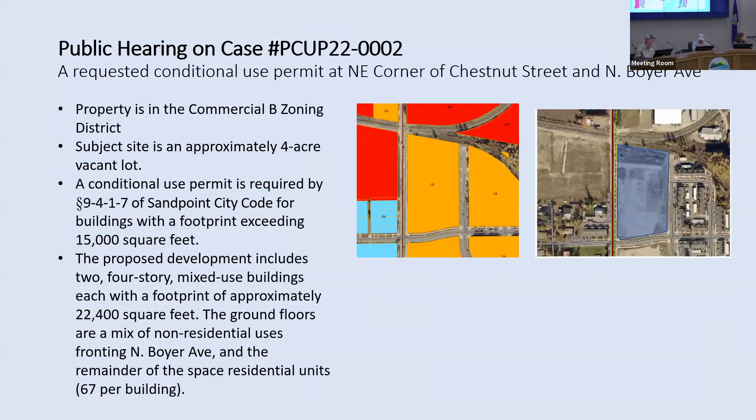I have a question related to the traffic study. So why are we against having them go onto Boyer? It looks like their parking lot at the north there goes onto Boyer. Again, because it's a principal arterial road, we try to limit access points onto arterial roads.

So if you don't allow them to access there, isn't that creating a dead end at that parking point? And for a fire truck, say there was a fire in that corner and the fire truck needed to get down there and there's parking, isn't that going to create an issue? Not specific to this site, because the building is fronting Boyer. The fire access could access the building from Boyer itself.

Quick question. The 4 stories, what other 4-story structures do we have? Is that an issue at all for public safety or not? It is not an issue. That's not an issue that's come up at all. Gotcha. I believe the apartments behind us are those 4-story? Okay, at least some of them are 4-story. Yes.

And then Amy, I have a question on the geotech. It talked about there's a specific type of foundation required based off of the soil conditions in that area. Do we know if their plans have addressed that? The applicant would probably have to answer that question. Okay.

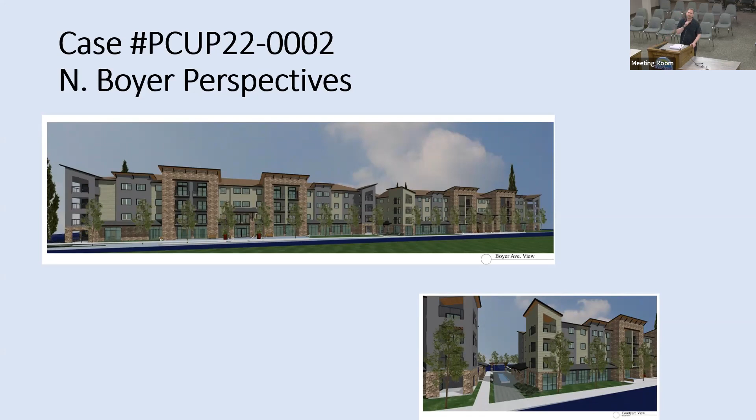But if we could go back to the floor plans, Amy, I think just back a page or two. Sorry. That's okay. Yeah, we're done. All right, floor plans. Here we go.

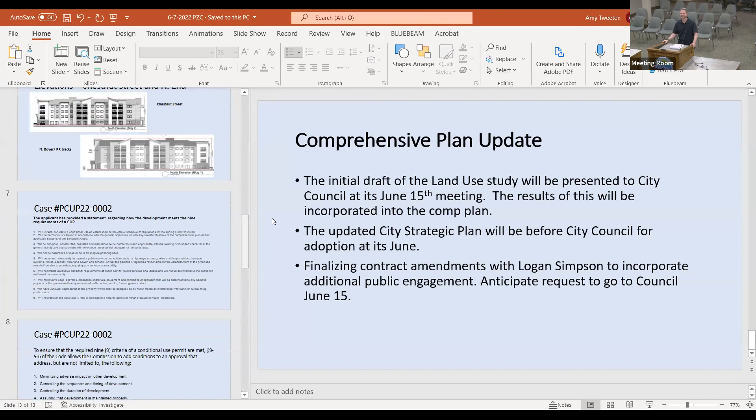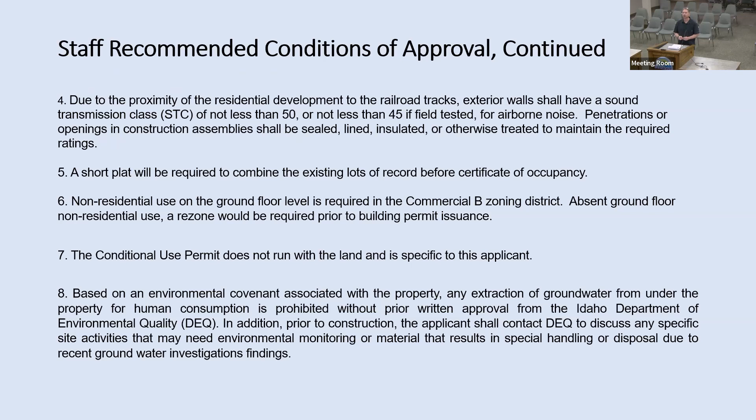So, work shall commence within 1 year—what does that mean? Does showing progress or submitting things count as work towards the project? For permits, I pulled out my narrative here and submitted this 3 months ago—it took 3 months to get here. I don't know how long permitting will take, and I know it's a busy time everywhere, so I'm kind of concerned with the time limits.

The other one was that the duration of the development shall be completed within 3 years. This is one of the things the owners are looking at right now—they're trying to decide: should we build one and see how the market treats it, or should we build both at the same time? These are not going to be cheap buildings. So that's one of my concerns—once construction starts, not knowing even how long it's going to take to get through the drawings and permitting.

But I'm sure this is going to be a year or more in the build of it, so I'm concerned about the 3-year limitation also. So both of those limitations, I don't know if there's a way to put wording in there that allows some flexibility, or if that can come back to the planning, if those have to be a part of the conditions.

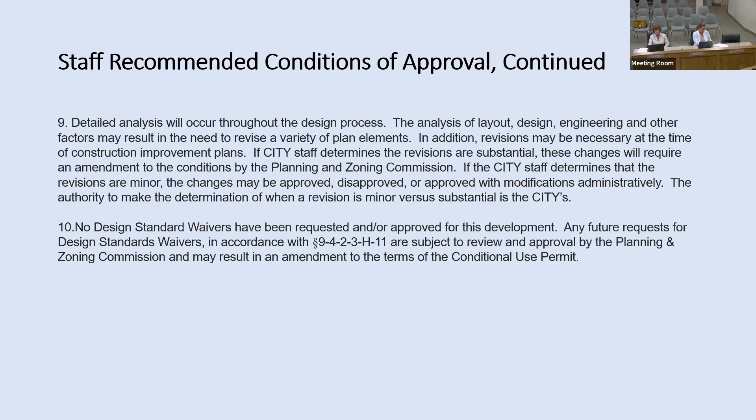9 is just saying we understand minor changes might occur, but anything major would have to come back to the commission. Yeah, and it's our understanding that no design waivers are being requested. Correct, yeah. I have a question about number 6, actually, and then if you can put up the plans of the 2 buildings for me, Amy.

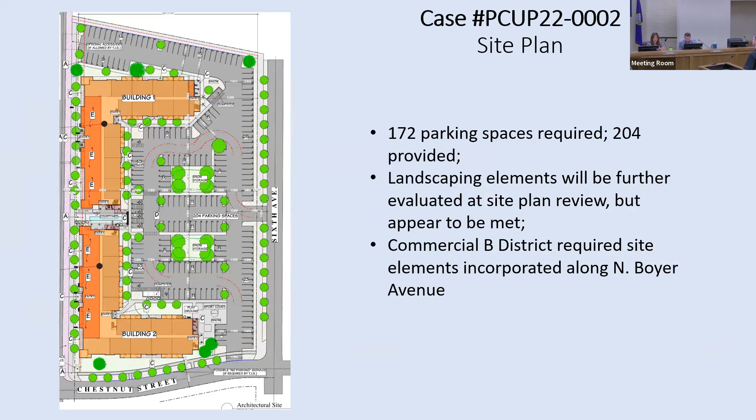That one, yes. Oh, the other one. Oh, floor plan, please. Floor plans? So, yes, thank you. So I'm looking at the commercial spaces.

Is that just - because I noticed that storage in that top one, correct? And from what number 6 says, non-residential use on the ground floor is required, so I imagine that will change. So again, we were at this level of design, we were looking at presenting something that we felt would meet the code and try to get past a litmus test without fully knowing what that space was going to be used for. So what I presented there, for the 2 buildings, are a little bit different, but similar.

What we're showing there would be like storage units that could be leased by tenants. The larger square in the middle was set aside for mechanical space for the whole facility. The next space down was a common entry into the building that could come into the gym space south of that.

Most of that space through the southern end was all dedicated towards workout areas and gym space, with an eye towards this would be great for the tenants, but it might be good to open it up for the neighborhood too. You don't know until you get into it.

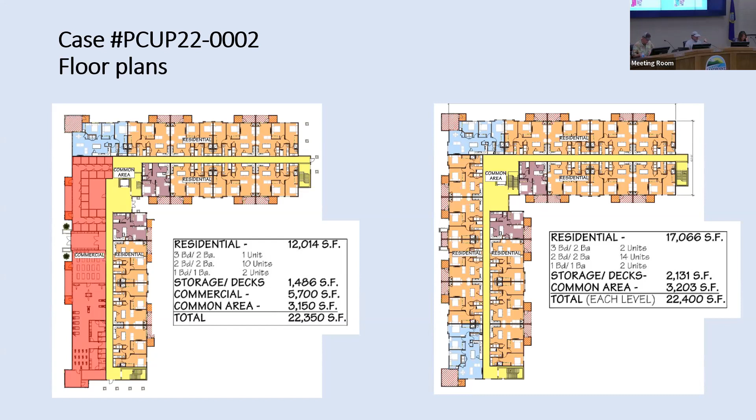Do commissioners have any other questions for the applicant at this time? I do not. No. Okay. Thank you. Thank you. Thank you.

We will now prepare to proceed to the public hearing. For those participating on Zoom, there are none, Mr. Chair. Thank you. We shall proceed.

The public hearing is now open. We will begin with those participating remotely, but we have no one on Zoom. We'll now recognize those in the room who wish to testify in favor, and I see nobody attending. Is there anyone else on Zoom or in the room who wishes to speak in favor? Okay, we'll move on to those who are neutral. Anybody on Zoom or in the room who wishes to speak neutral? And finally, is there anybody in the room or on Zoom who wishes to speak in opposition to this request?

Is there anyone who would like to speak on this matter and has not had an opportunity to do so? Just following the rules. Do commissioners have any final questions at this time? Will you address staff? Soon, yes, soon. And seeing no additional testimony, I'm going to assume that the applicant has no rebuttal at this time.

So if there are no further questions, I will close the public hearing, and at this time we will deliberate. And now is the time where we can ask questions to city staff.

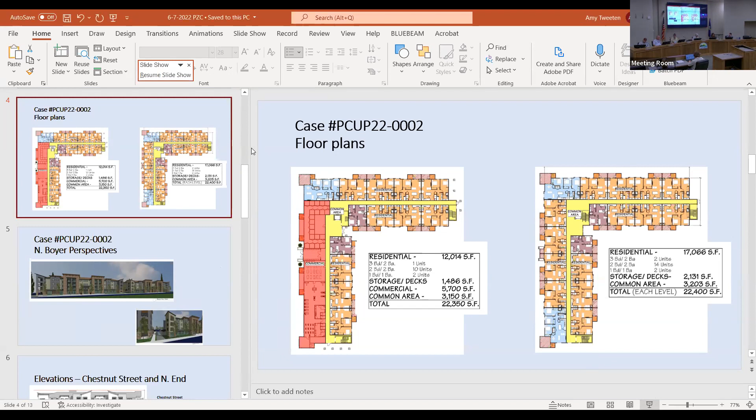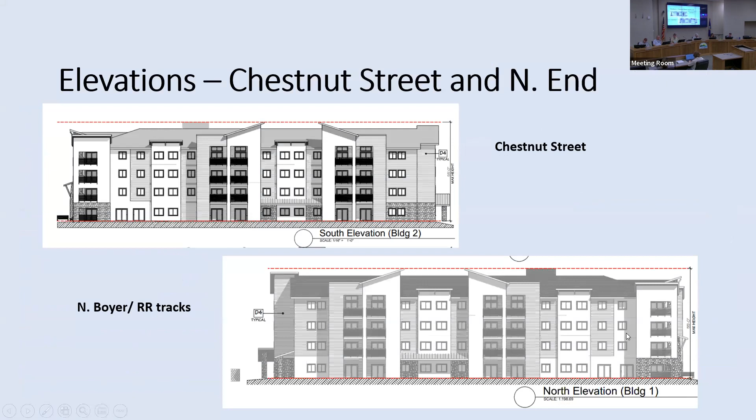Can we see it again? Oops, yep, over there. No, not that one either. There you go, there, number 3.

That's for the entire project for both buildings, correct? That could be, well, 3 years for both buildings might be a short time frame. Again, the intent was to get projects going, so there's that 3 years, and there's some restrictions on the amount of time that can elapse after a building permit is issued as well.

So you could add language that says they must pull the second building permit within 3 years, have a certificate of occupancy issued on the first building and a second permit pulled. Or you could add language with an option for an additional 1 year extension at the discretion of staff. If staff denies it, the applicant would always have the ability to appeal that decision to you.

So they always can come back for an extension on number 3 though. They could come back and ask for an extension. If the concern is that they may not want to have to bring it back to you, you could put that latitude for an extension in number 3.